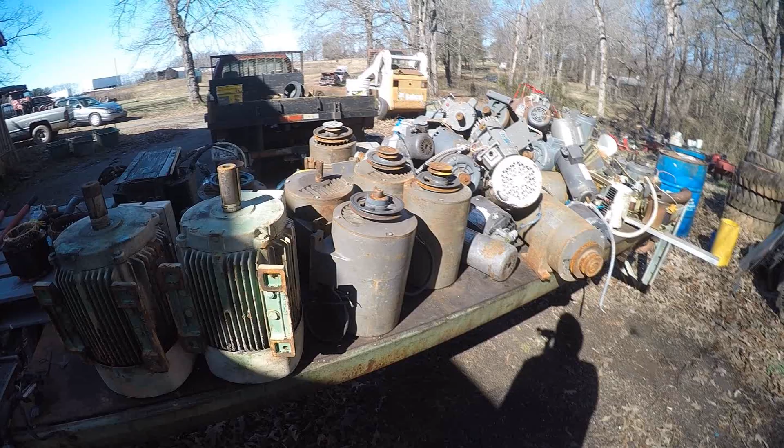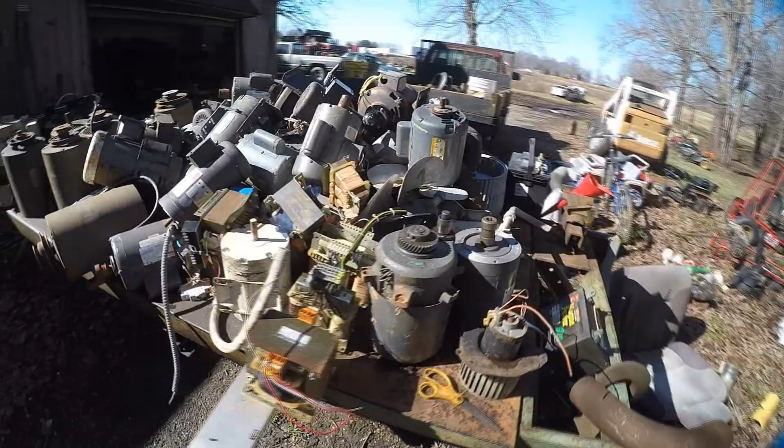A couple videos ago I made some tools to harvest copper from scrap electric motors, and it worked pretty well, but I am curious how much you can actually make doing this. So I have acquired approximately 3,000 pounds of scrap AC induction motors, all piled here on this trailer, and I'm going to process them all and see what comes of it.

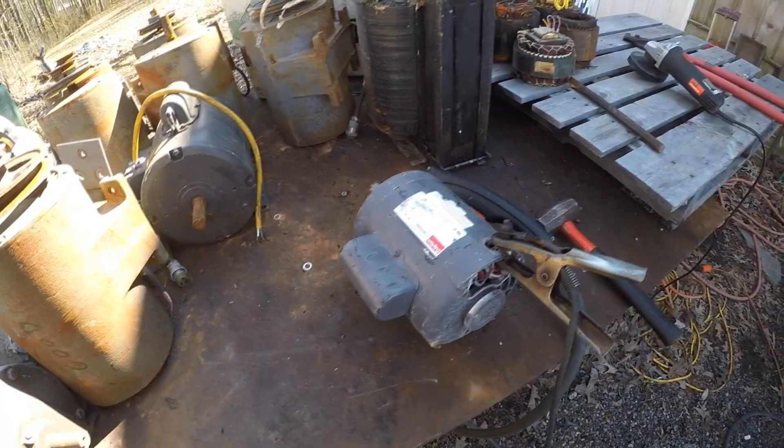So it's pretty simple. First thing to do is cut the casing off the motor. I'm going to use a plasma cutter because I have one. You can absolutely do this with a grinder and cutoff wheel as well. It just takes longer.

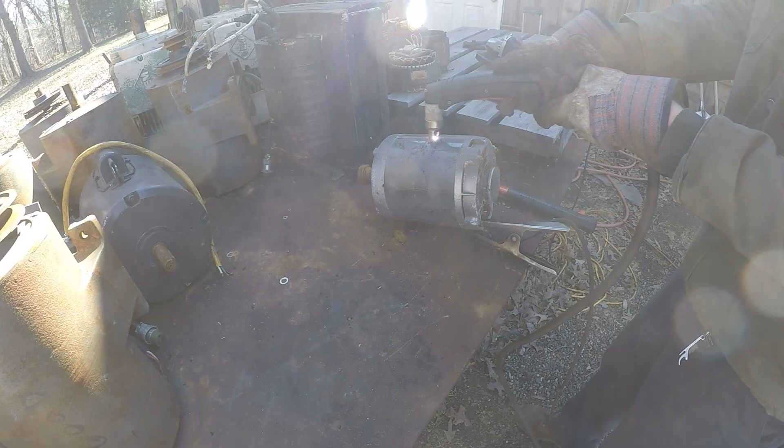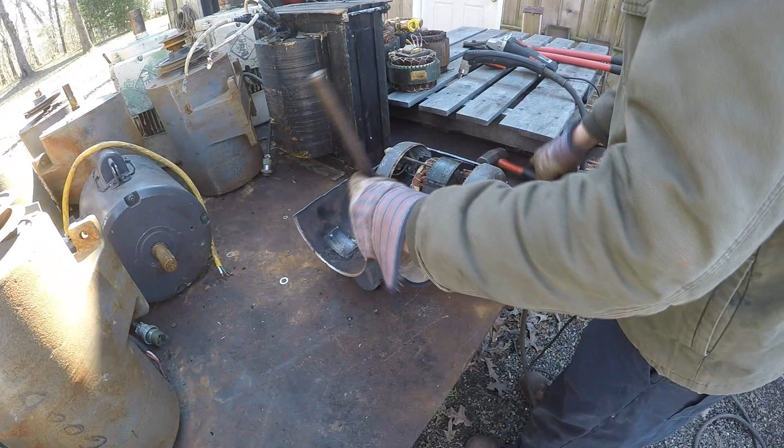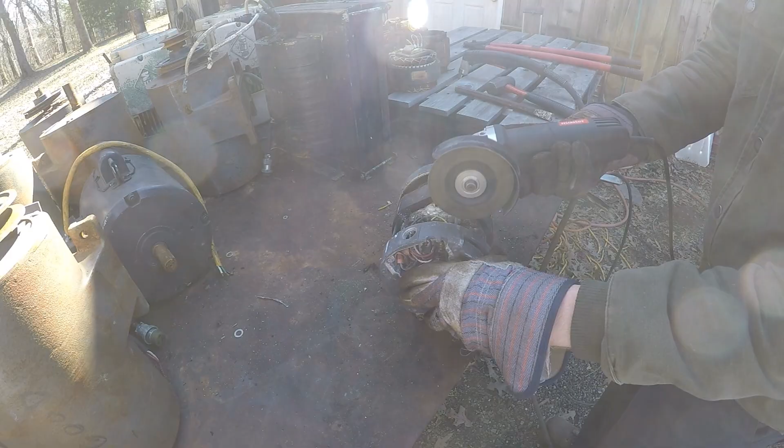So once you got the case off, then we just need to cut through these 4 bolts that hold the end bells together. Then knock one of the ends off. Usually the back end is easier.

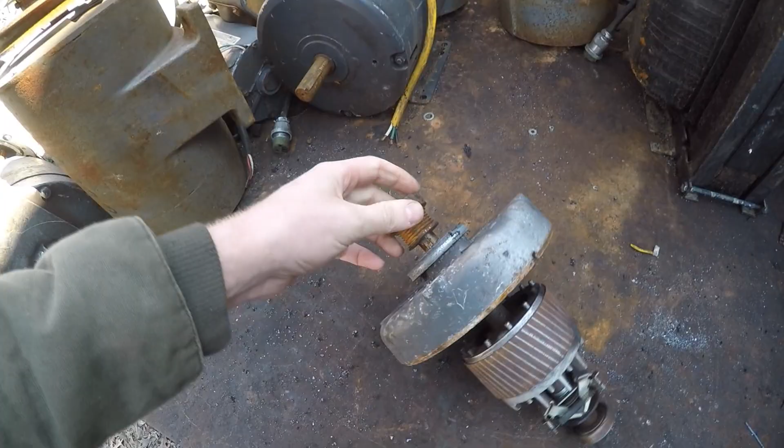There you go. That's the rotor out. I would like to get that aluminum off there, but not if it's going to take me all day, so I'll figure that out later.

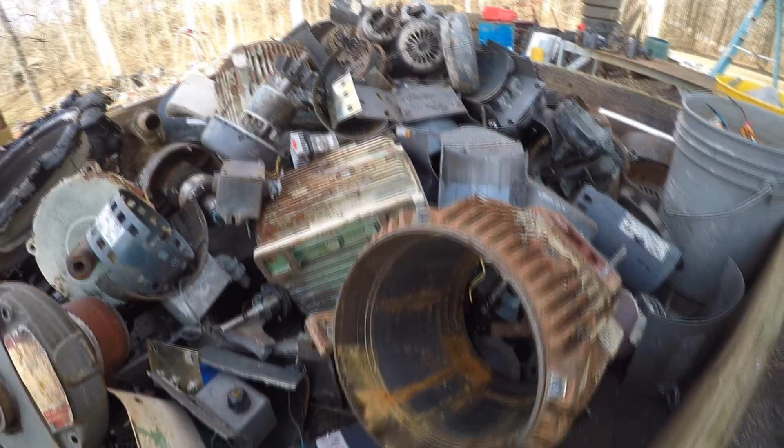Got those all cut up. The sheet metal cased ones were easy enough, but most of the ones that were cased in cast iron were too thick to easily cut with the plasma cutter, so I just ended up smashing them apart with a hammer, and that was a ton of work. So I definitely need to come up with a better system for that if I do this again.

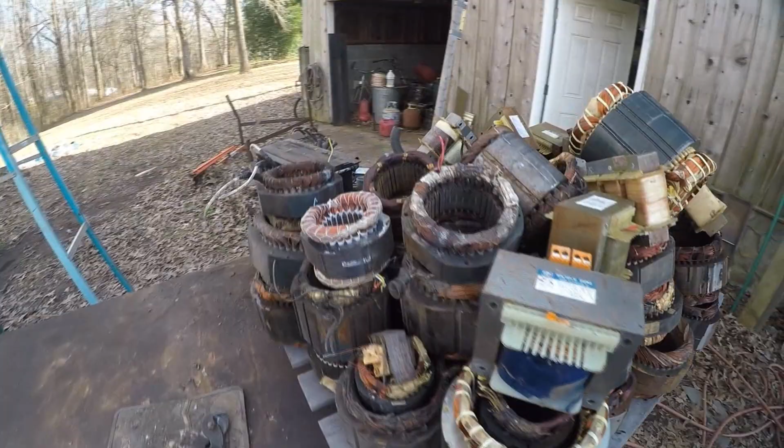But I did end up with a nice pile of stators and some transformers, so I'm going to go and start pulling the copper out of these. I'm all ready to go here. This is very safe.

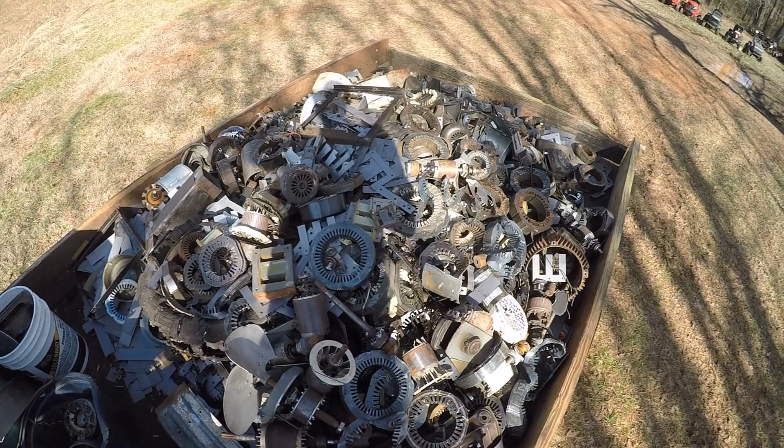I've got all the steel piled up on the truck here, along with some clean aluminum, dirty aluminum, a little bit of insulated wire, all the motor windings I put in this barrel, and then this tub actually has all the copper from that big transformer that was sitting there. That was too big to fit in the splitter, so I ended up taking it apart by hand, which was really tedious, but it did have a bunch of copper in it. But I am super curious to find out what this all breaks down to, so let's go to the scrapyard.

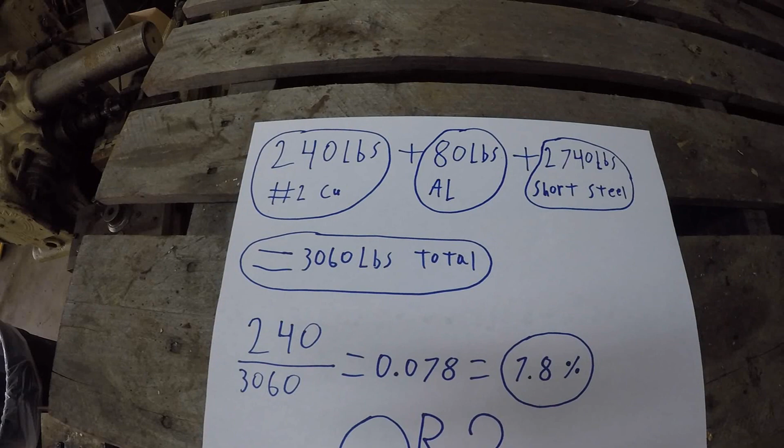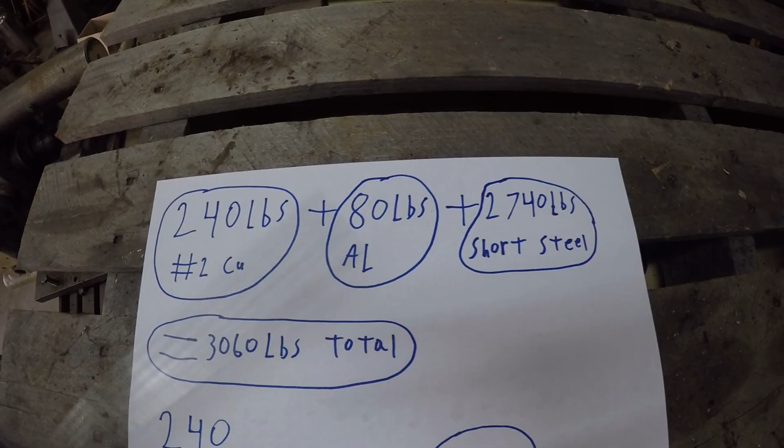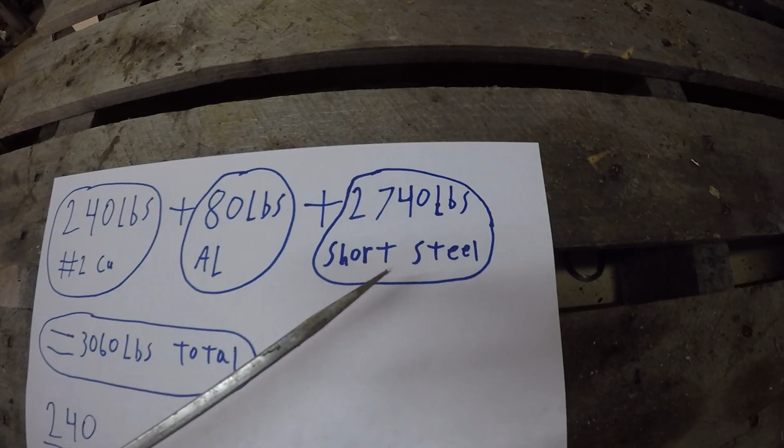On the scale ticket that the scrapyard gave me, there was 240 pounds of number 2 copper. That was all the motor windings and the windings from those small transformers that were in that blue barrel. There's 80 pounds of cast aluminum. Some of it was clean, some of it was dirty. I cleaned some of it. It's kind of negligible anyway, but I just put it in there to be complete. And 2,740 pounds of short steel, and that was all the stators, rotors, casings, etc. So that comes out to 3,060 pounds of total electric motors.

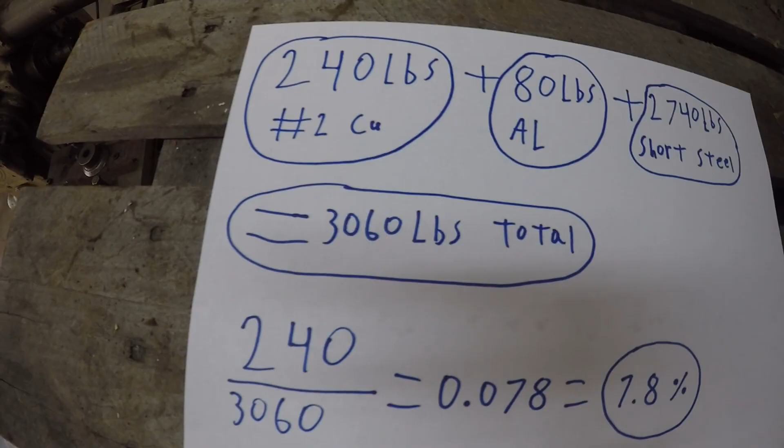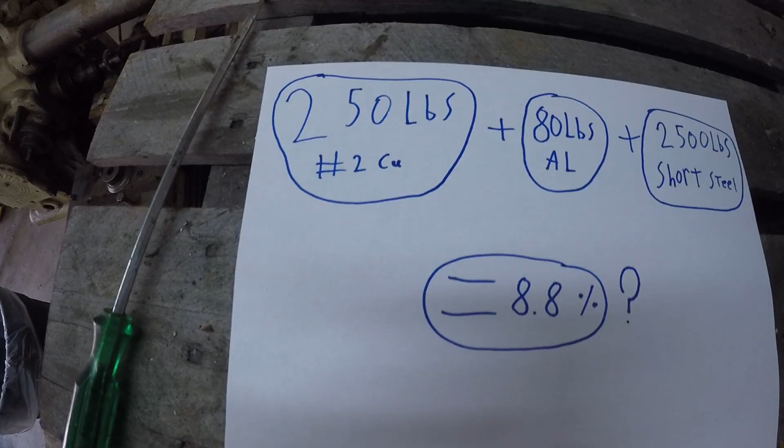And if you divide 240 pounds of windings by 3,060 pounds total, you get 7.8% copper by weight. That's a little bit lower than I thought it would be, but it actually might be a bit better if we make some assumptions here. We weighed the copper on the truck scale, and the truck scale rounds to the nearest 20-pound increment, I think. So it's possible that there was up to 250 pounds of copper, and it got rounded down to 240.

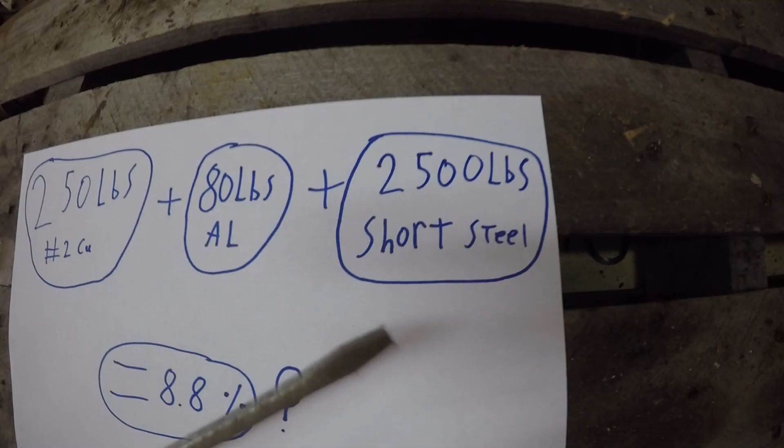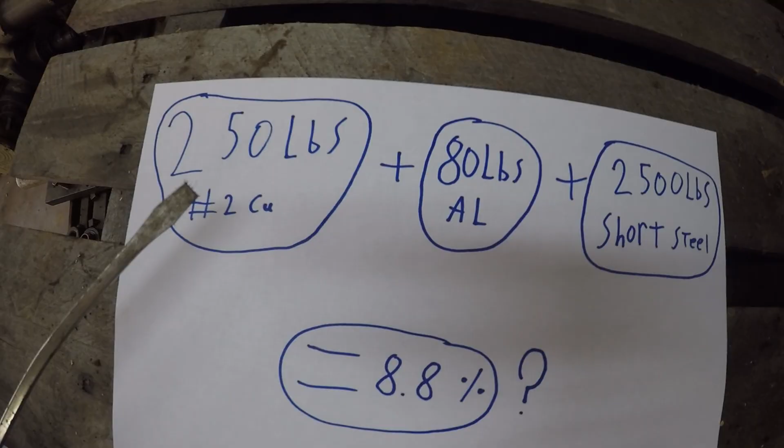Additionally, I know I put some extra steel on there that was not part of the motors, and I think it was about 200 to 250 pounds. So if we take that into account and assume there was 2,500 pounds of steel and 250 pounds of copper, and do the math again, it comes out to 8.8% copper by weight for those motors. So based on that, I would assume that a given pile of electric motors is going to be about 7.5 to 9% copper by weight.

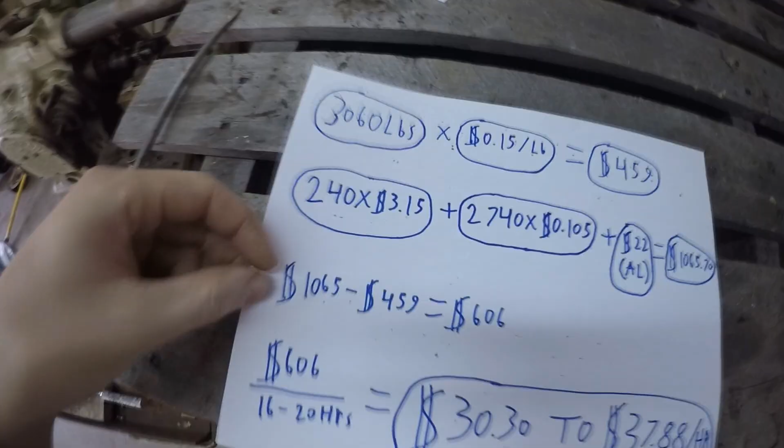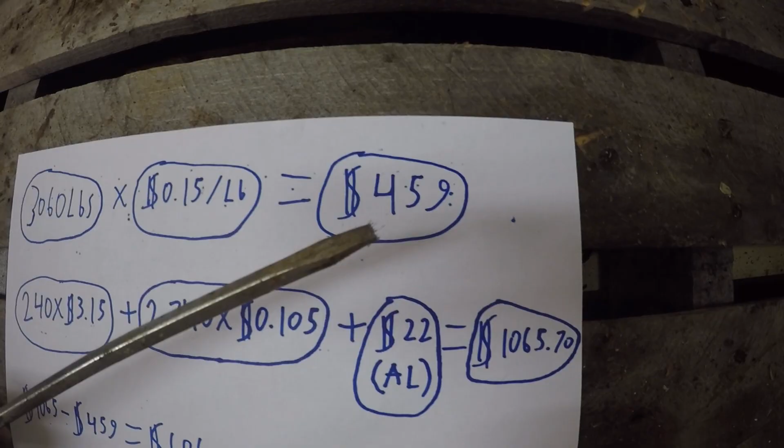As to how much I actually made doing this, if I had taken those motors in whole, it would have been 3,060 pounds, as I said. The yard I went to and all the yards around that I could find were paying 15 cents a pound for electric motors, so that would have been $459 if I had just taken them to the yard and dumped them off.

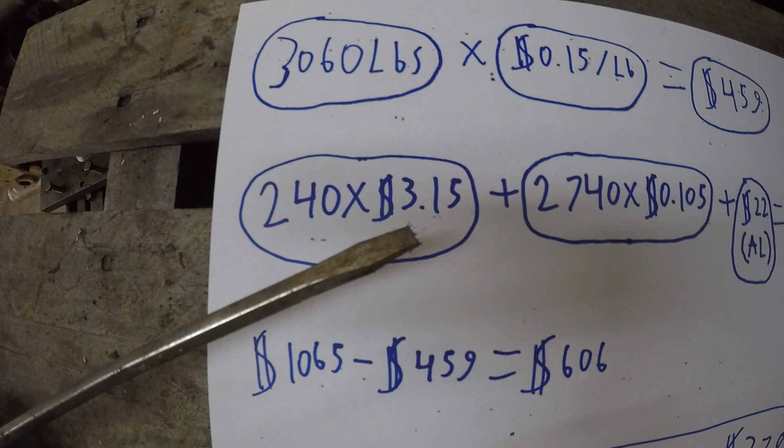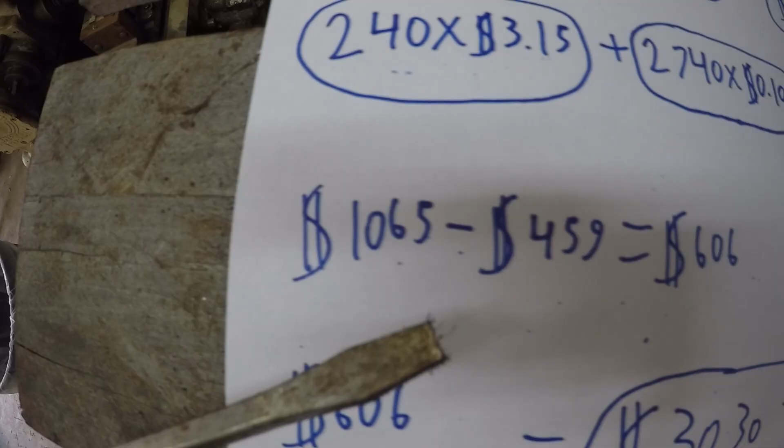Because I broke them down, it was 240 pounds of number 2 copper times $3.15 a pound, plus 2,740 pounds of short steel times 10.5 cents per pound, plus $22 for the aluminum, which comes to $1,065.70 total. So the $1,065 minus the $459 I would have got for them whole is a $606 increase in the value by breaking them down.

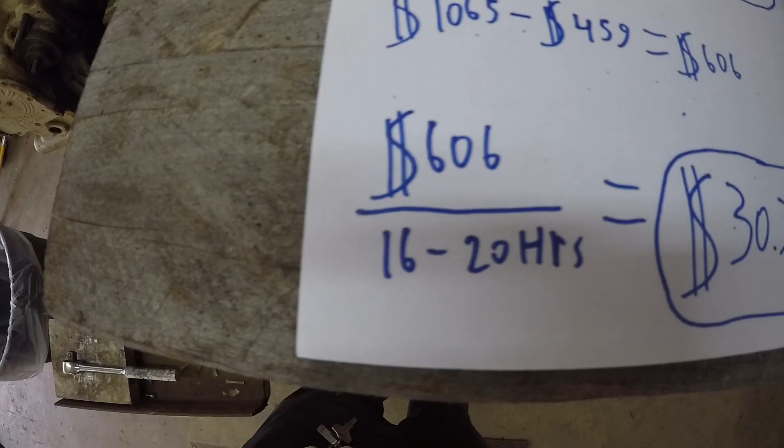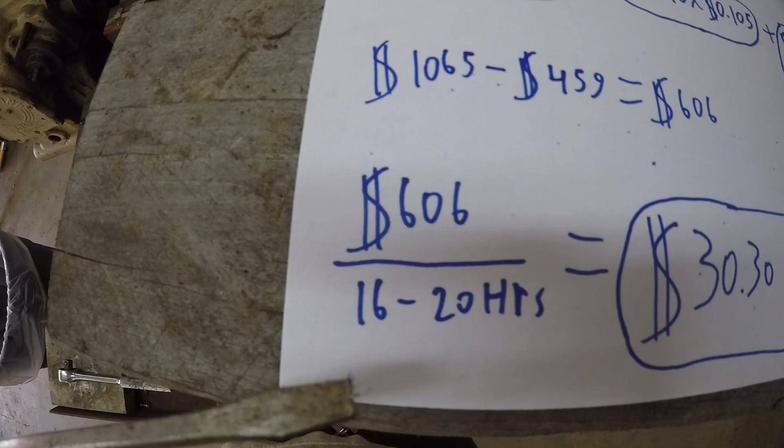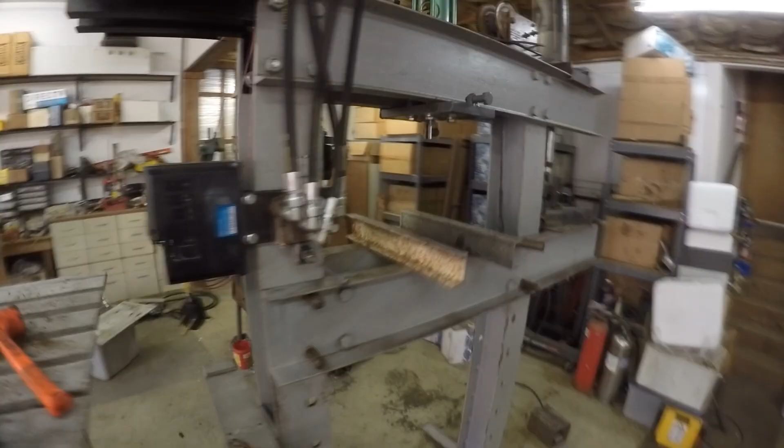It took me 2 days to break them all down. I'm gonna call it 16 to 20 hours. I figured 2 8 to 10 hour shifts, give or take. So that $606 divided by 16 to 20 hours comes out to about $30 to almost $40 an hour. I think that's pretty good for me. There is definitely room for improvement as well to make the process go faster.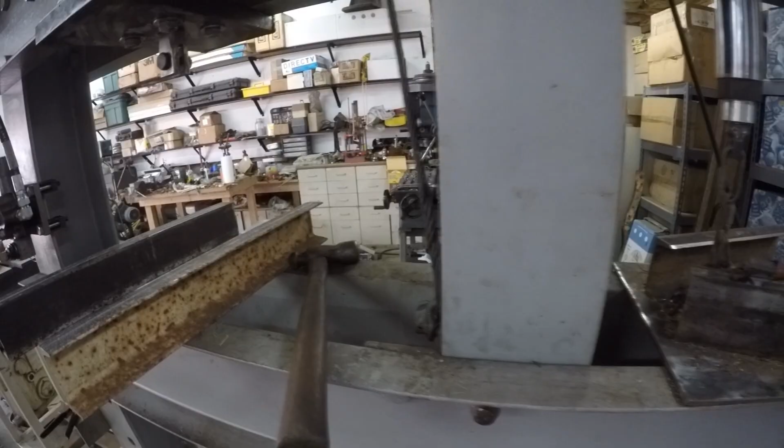There were really 2 big bottlenecks. One was cutting cast iron cases off. I was not well equipped for that. I ended up mostly just smashing them off with a hammer, which was pretty tedious and a ton of work. It took a lot longer than I thought it would.

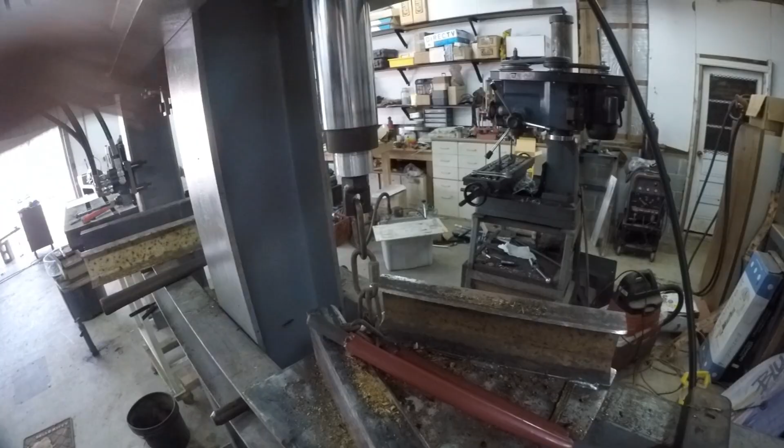And the other thing that slowed me down a lot was pulling the windings. This thing just doesn't have quite enough power to pull the bigger ones. I think you could see even on the time lapse, I struggled with a few of them. I had to get in there and kind of wiggle it until I could break a chunk loose and then just sort of work my way around the whole stator. And that was pretty tedious. It would have been nice to be able to just do them all in one cycle like I could on a lot of the smaller ones.

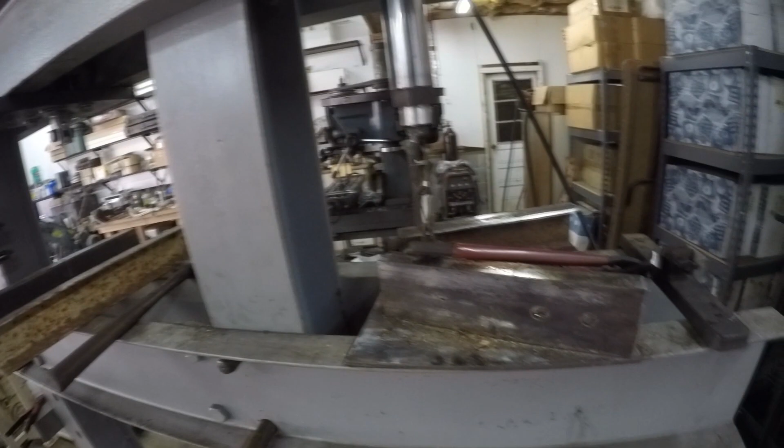But I've got lots of ideas for better ways to do that, and I would definitely call this a success. I would do it again. If I come across another deal on electric motors, I probably will do it again.